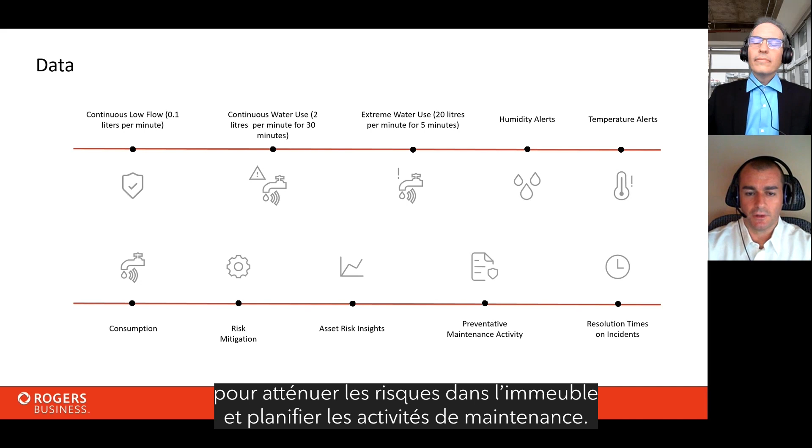Combining this with the temperature and humidity alerts gives you great insights to not only mitigate risk from the building, but also plan preventative maintenance activities. As infrastructure ages, it's going to be more prone to failure, so having these insights available gives you great insight as to when you should start doing repairs and/or replacements to the critical infrastructure of the building.

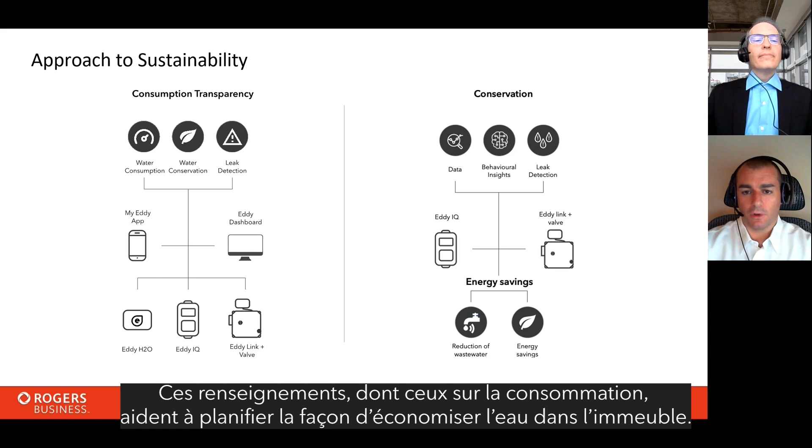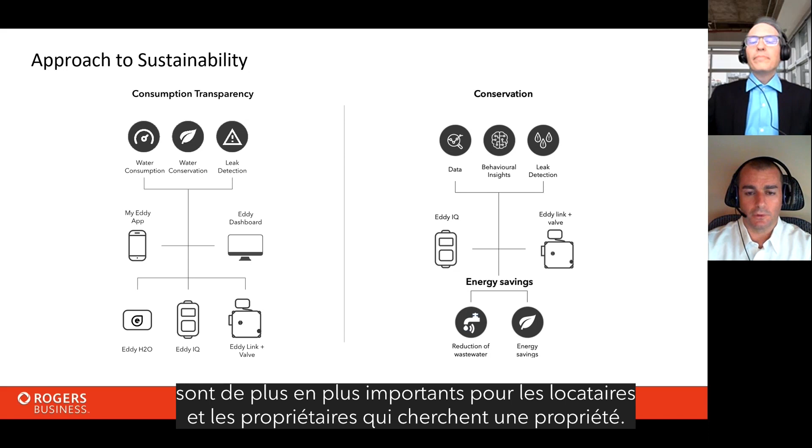By having these insights, especially around consumption, you'll be able to plan on how to save water for the building. Reducing water consumption could help you move towards some of the sustainability targets for your property. As ESG becomes more and more important in terms of building operations, as well as what tenants or owners look for in a property, this is one valuable asset you could include on top of the protection you're going to be receiving for the building.

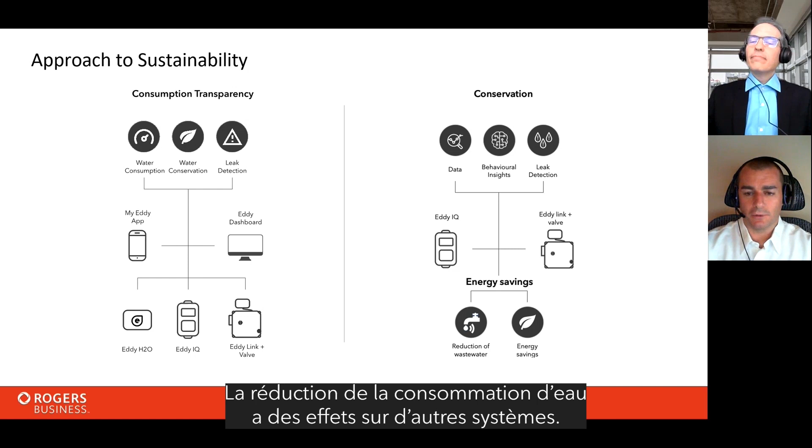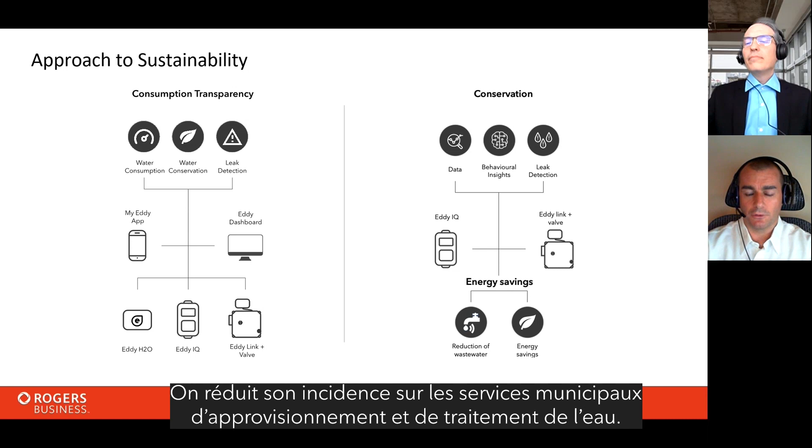By reducing consumption of water, there's also a trickle-down effect to other systems. Reducing water consumption reduces the impact on the municipal services that have to deliver and treat that water, and it reduces energy to the building as a whole.

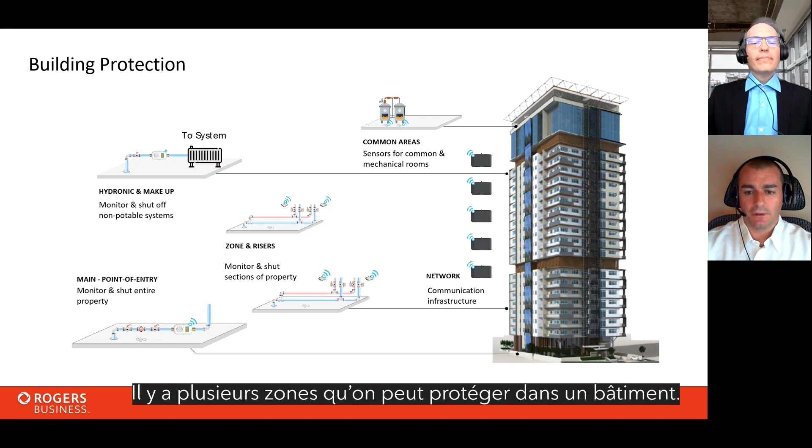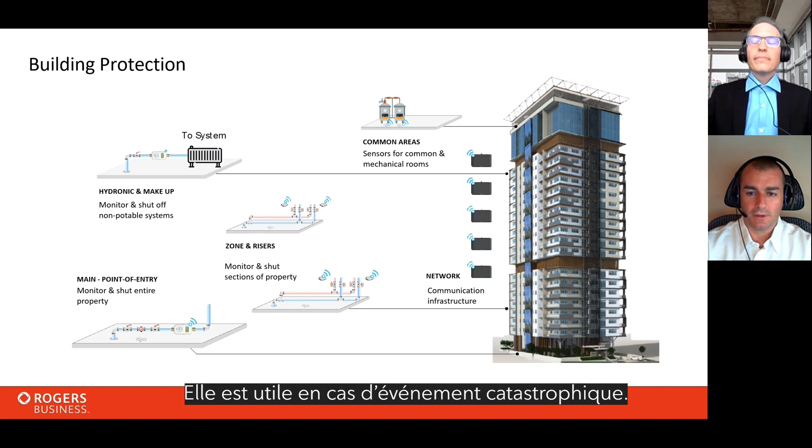There are a number of areas that we can protect throughout a building. This example shows a high rise, but if you're not working with a high rise, the concepts can still be applied on a smaller scale. We'll almost always put a shutoff valve on the main point of entry where the water comes into the building, for a catastrophic event, so you have an avenue to shut that down and mitigate any further damage.

We do this for both the domestic cold systems, usually on the lower level, and the hot water systems as well, which could be on the same level or, in larger buildings, in the mechanical penthouse. For larger buildings with water systems segmented into zones, we have the ability to put valves onto the zones, so you can isolate a portion of the building and minimize impact to tenants if a shutdown is required.

Another key aspect: water is also used for heating and cooling in many cases, in what's called a closed loop system. We can monitor this as well to ensure that anytime water is being added to that system, it's not an excess amount, since closed loop systems by nature don't need a lot of additional water once they're filled.

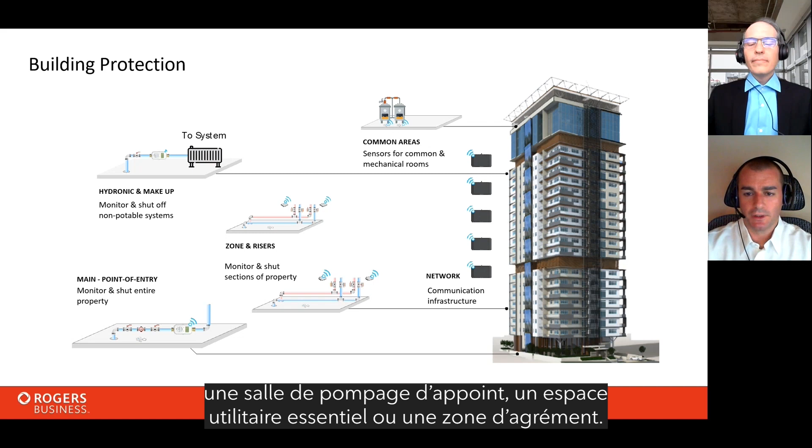We can also place our sensors throughout the building in common areas, the mechanical penthouse, the booster pump room, any other critical utility spaces, as well as amenity spaces. So if you have a gym in your facility, a party room, or a kitchenette, those sorts of areas could have the sensor as well.

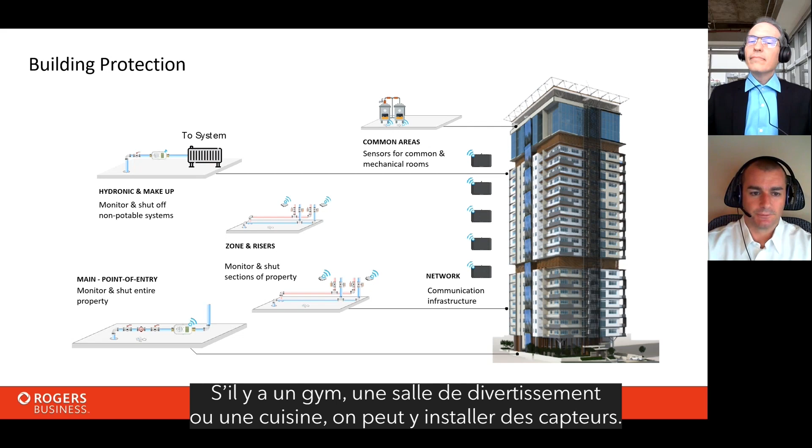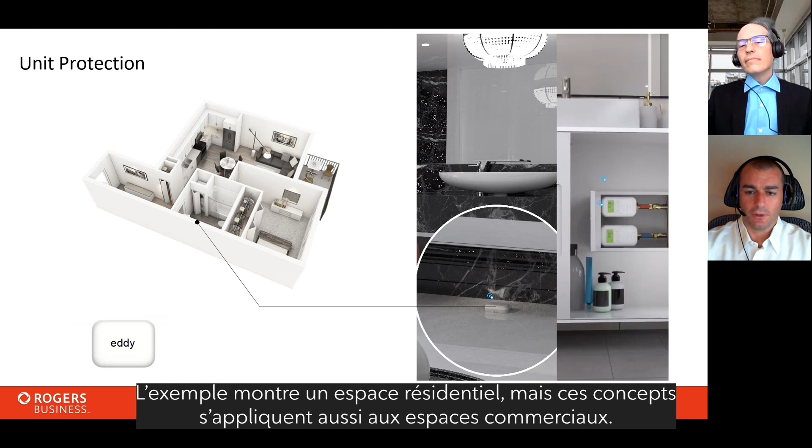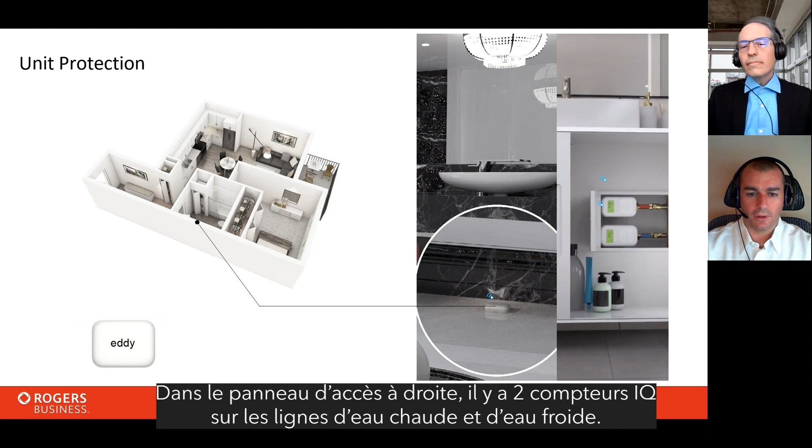For in-unit, there are a number of different areas that we can protect. This is giving a snapshot of a residential view, but you could also apply the same concepts to a commercial property. You see on the far right there in the little cupboard, there's 2 IQ meters on the hot and cold line. Those could be done either residential or commercial, and those would provide isolation at the unit level as well as a shutoff.

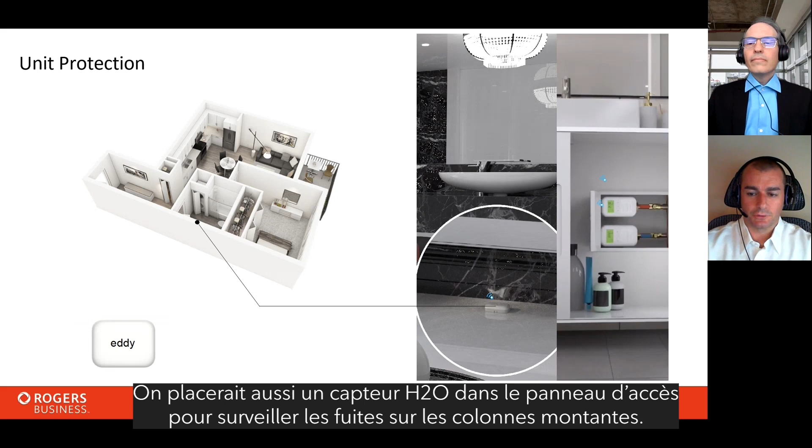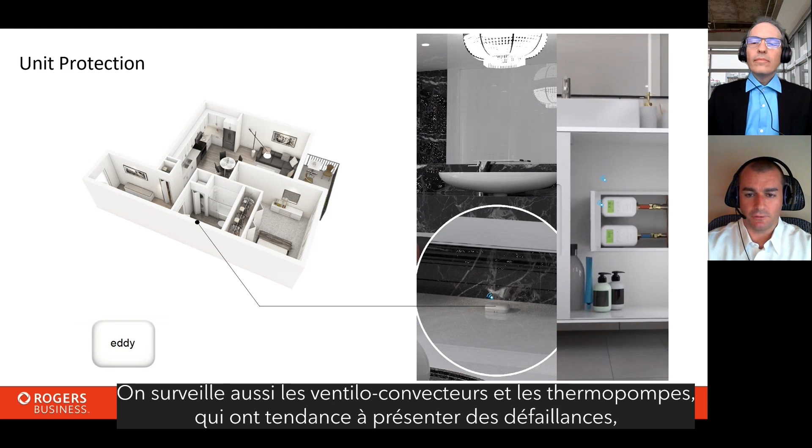We would also put one of our H2O sensors inside that access panel to monitor for any leaks of the riser, because those typically wouldn't be visible until the damage has spread quite far. Also through the unit, we would monitor fan coil units or heat pumps because those have a tendency to have failures, whether it's a backup from the condensate pan drain or one of the risers bursting. So those are areas we can monitor as well.

And then throughout the unit, other water appliances, kitchenette, washrooms, laundry areas.

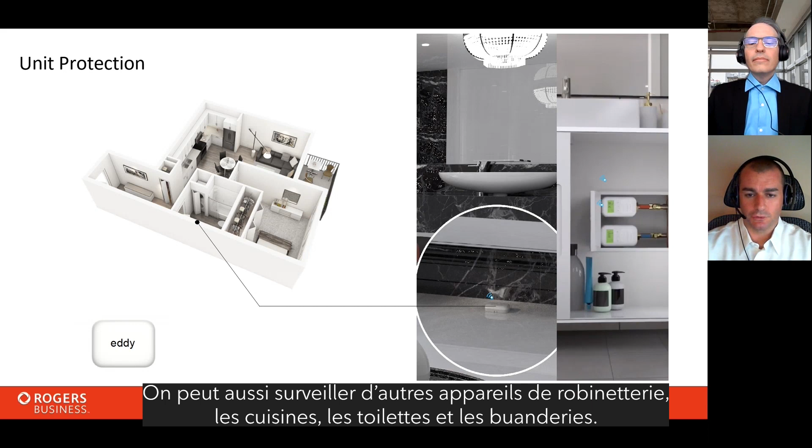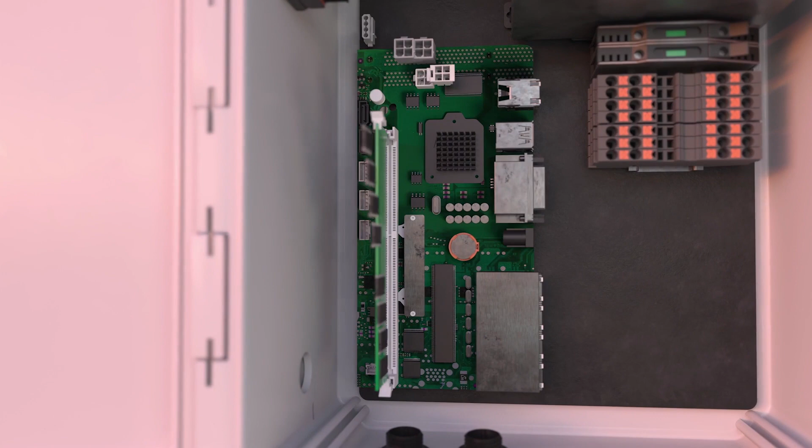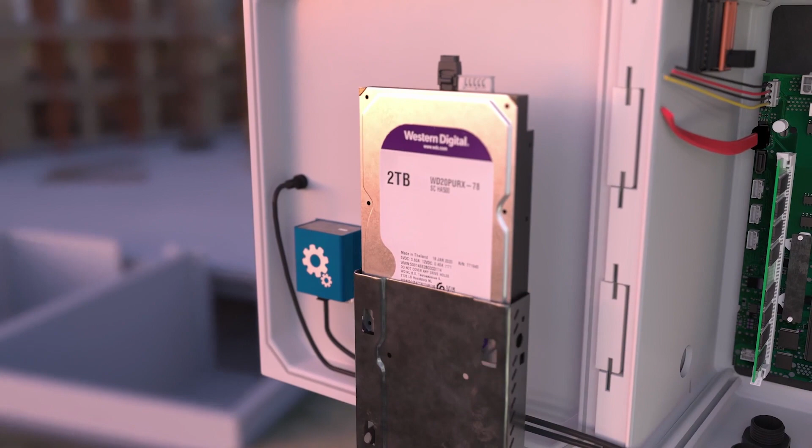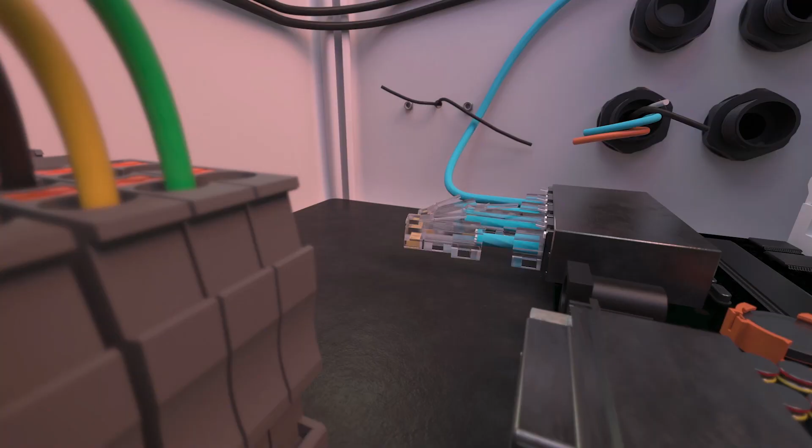Our objective is clear: the early detection and deterrence of criminal activity in real time. Through hardware and software engineering, we have created the most innovative monitoring platform to date, synergizing the limitless potential of future technologies with human intuition. Our proprietary communication protocols over cellular allow for up to 4K resolution transmissions of live video feeds, as well as a multitude of other transmission pipelines for peripherals and additional data metrics. Each unit is completely autonomous, with communications engineered into each device, allowing for a high level of redundancy. In rare situations where one unit fails, the other units on site remain fully operational.

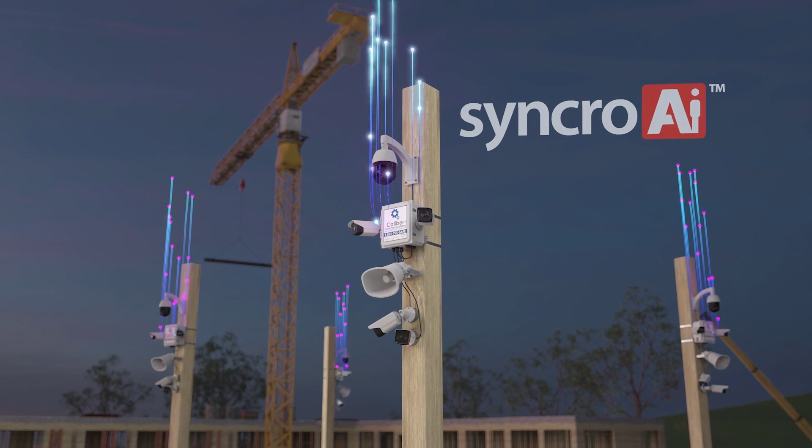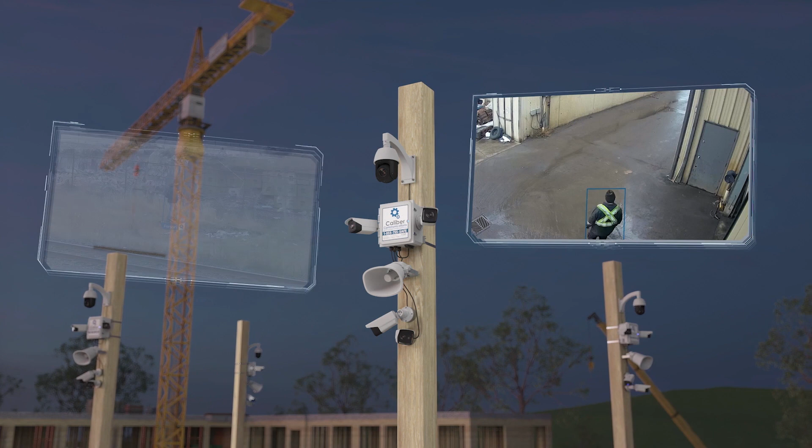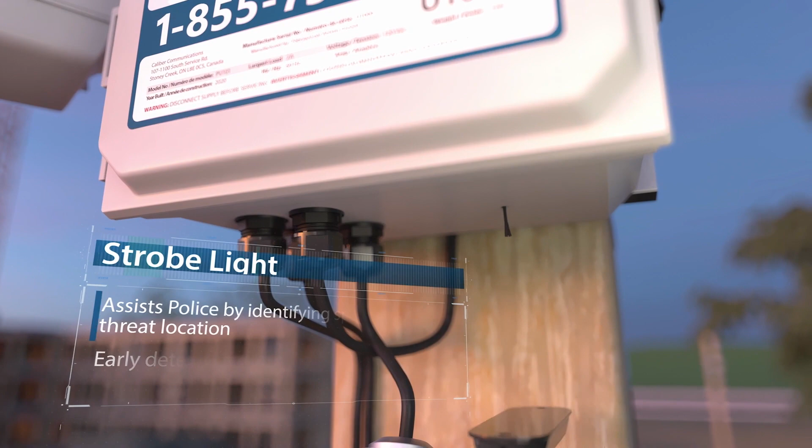Syncro AI, our dedicated on-site neural net, is utilized to train custom subsets for specific client analytical needs. This system intelligently recognizes human beings for crime prevention, as well as many other objects, with additional custom detections added regularly. Our revolutionary video monitoring system utilizes a high-resolution, long-zoom PTZ camera that provides a full view and control of the site for live video patrolling and evidence collection. Two high-resolution stationary cameras with the ability for additional cameras to be integrated when needed for analytic recognition and situational awareness. Our strobe lights are used to identify threat locations and are a visual deterrent to trespassers. Our proprietary speaker protocol guarantees the most reliable and clear communication in the industry for fast and effective deterrence of crime.

Our optional license plate reading cameras capture images with our proprietary Syncro Plate system, automatically databasing them for your review. Optional thermal identification cameras with full-range analytics are used for detection of intrusion in no-light situations. All of these peripherals are engineered for synchronicity and create the most advanced modular remote video monitoring system available to safeguard your assets.

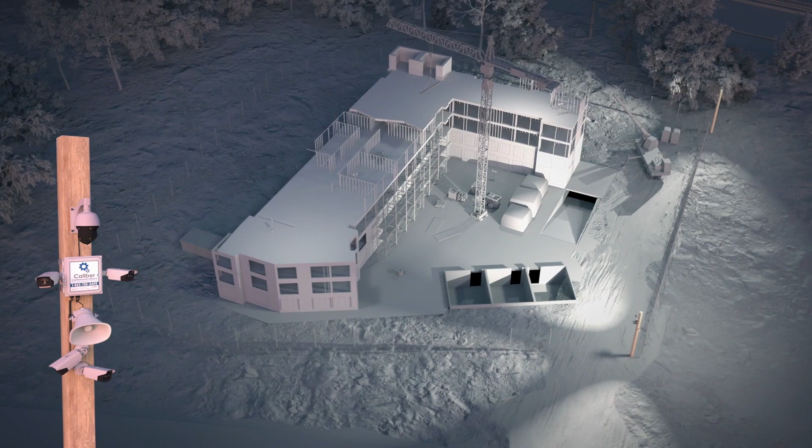Our units are placed strategically around the location to provide optimal security coverage, with fixed cameras providing perimeter coverage, PTZ cameras for evidence and detail collection, and plate readers at road access points, culminating in complete coverage and security of your project.

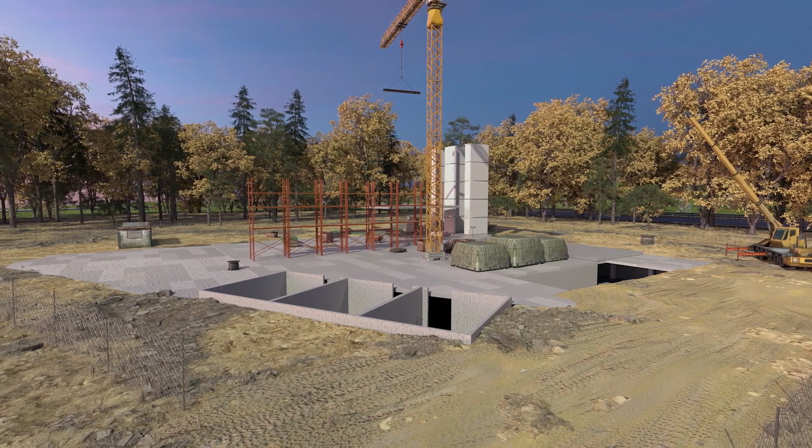Our in-house technicians utilize snapshots from project cameras in 4K resolution to produce high-quality time-lapse videos of your project being built, brick by brick.

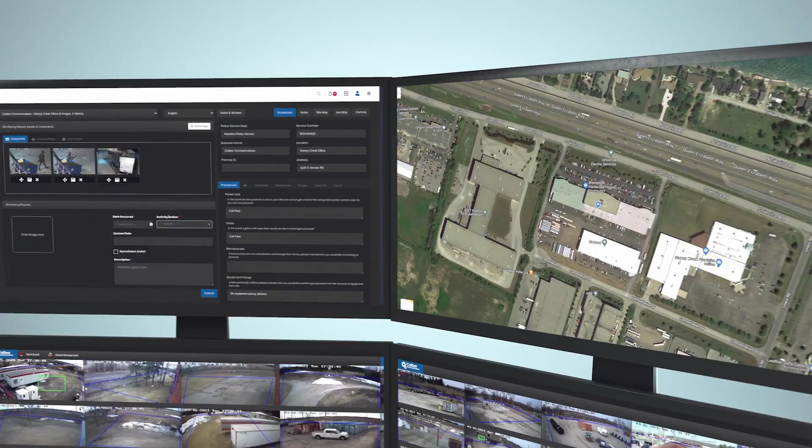Our system technicians customize analytics to each camera view to maximize detection effectiveness. When a perpetrator approaches, our monitoring operators are quick to respond with voice commands to deter and will inform authorities when required. The operators gather and qualify evidence and create log reports to keep you informed of the ongoings at your location.

All of the security-related information from your property, all in one spot. This is security made simple. Our proprietary system provides a user-friendly location to obtain critical security information from your property in real time and viewable on all of your devices, keeping you informed exactly when it happens for complete transparency and accountability.

Synchro Plates is an innovative and proprietary license plate reading system and searchable database that provides evidence that aids in police apprehensions, while also being an exceptional site management tool, allowing you to whitelist or blacklist vehicles, track arriving or departing employees, and even verify deliveries.

Synchro Alerts provides alert emails and SMS text messages exactly when you requested them. It's that simple. We are changing the way you view security. We are the future of security today.

Okay, so hopefully that gave everybody a decent overview of exactly what it is we do. I'm obviously going to go into a little bit more detail here. The one thing I'll point out is that video uses construction as a very heavy example of what it is that we do and some of our verticals that we cover.